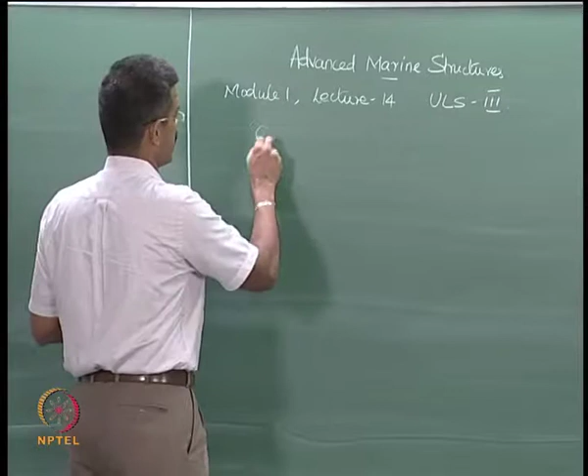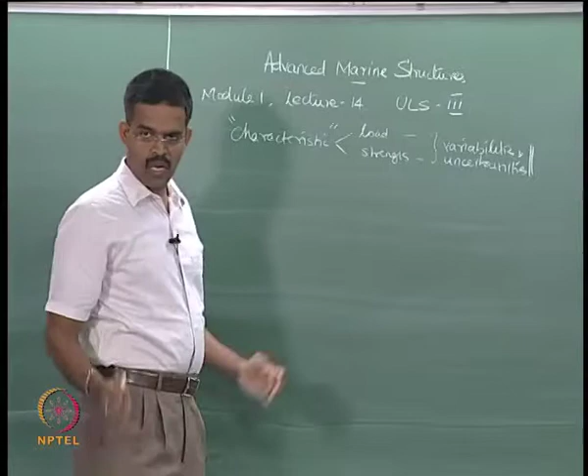This may refer to load or strength of material. We agree strongly that both the environmental loads encountering marine structures and the strength of material out of which these structures are constructed have a lot of variabilities and uncertainties in their computation, as well as in the assessment of strength. To account for this we introduce an adjective to these estimates, what we call characteristic. We agree that if load and strength are to account for different variabilities or uncertainties inherently present in their estimates, then the value should be probabilistic, it cannot be deterministic.

So to handle the probabilistic nature of these uncertainties we introduce a term called characteristic, and we agree that the distribution of these uncertainties or variabilities, based on which they vary, is normally distributed. Then we look at the distribution of their means.

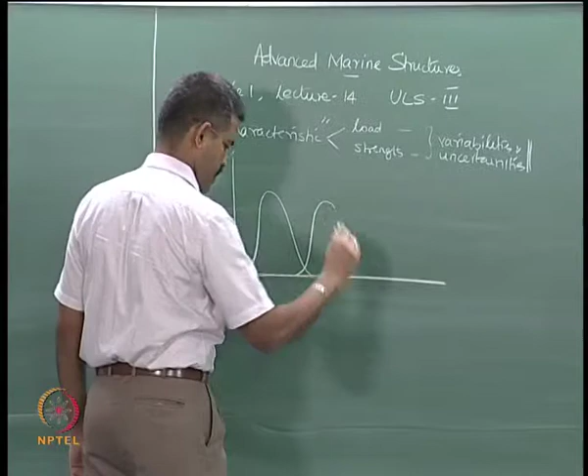I call this load, and this response. The hatched portion you see here is actually the probability of failure. This becomes the mean of the load and this becomes the mean of the response. Now I assume two distributions, R1 and R2. R1 may not have any superposition or overlap with the load, whereas distribution R2 may have an overlap with the distribution of the load.

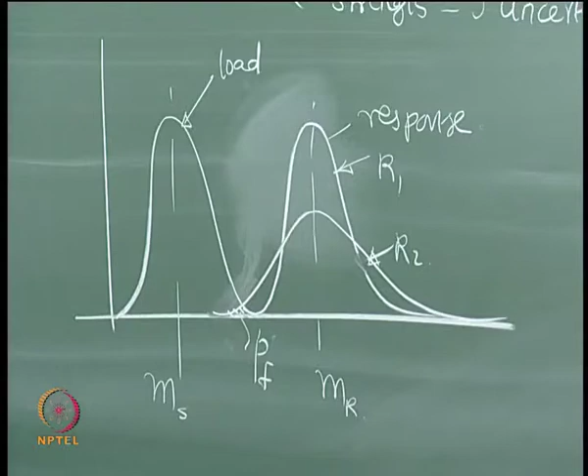We ensure that when the strength or resistance is lower than the applied load, it indicates a failure phenomenon. Now this can be equivalently understood as two distributions without overlap. I do not want a probability of failure, that is my ideal design.

So I select the mean in such a way that they do not have any overlap, agree? But the difficulty here is then how will you account for the excess in load estimates or deficiency in strength because of deterioration. So we fix up what we call

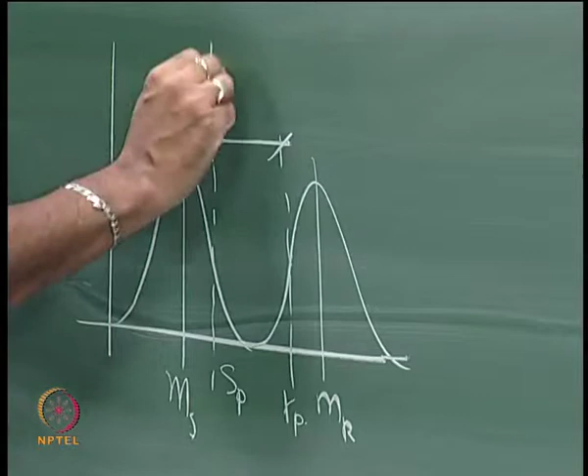the percentile fractile values. We call this SP and this point RP, and RP is gamma of SP. So obviously you will see that SP and RP are essentially certain percentages of the fractile of the distribution. SP is selected as 95% and RP is selected as 5%.

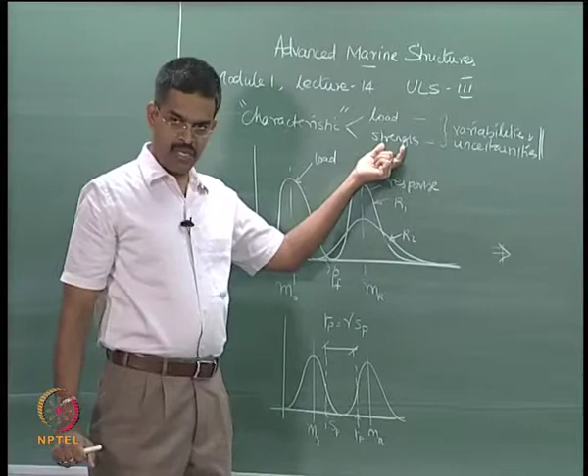So what it means is whatever load you have assumed on the structure, the probability of exceedance of that load in the lifespan of the structure is only 5%, that is, 95% it is reliable. And whatever strength you have appropriated in the design, 95% that strength will be met, but there is a probability of loss of strength only by 5%.

So what I am doing is instead of moving the mean value closer, I am keeping the mean value away, but fixing up two numbers which are called the characteristic values. So these SP and RP will define the characteristic nature of the load and strength respectively.

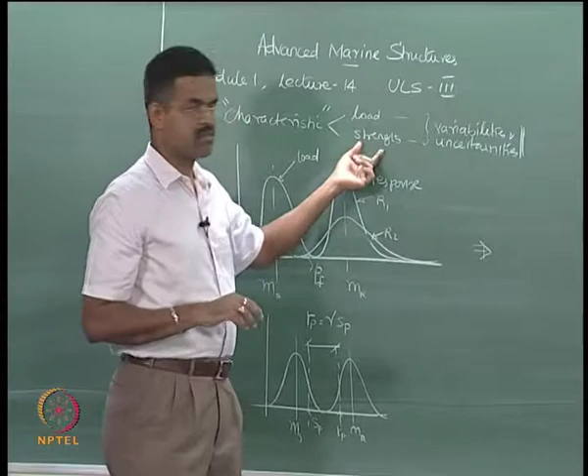As I said, they are independently varying, because the load variation or uncertainties associated with load have no direct connectivity or dependency on the uncertainty or variabilities associated with the strength of the material. So they are independently varying. The parameters on which load varies will be different from the parameters for strength, but for our understanding in design we have to look at safety as an integral unit of load and strength. We are looking for the safety of the system, so we have to connect them. The connection is essentially by this equation, where gamma gives you the margin of safety.

So SP will be associated with 95% of the fractile, whereas RP will be associated with 5% of the fractile. This is of course with the load, this is of course with the strength. So the probability of exceedance of the load in the lifespan of the structure is only 5%.

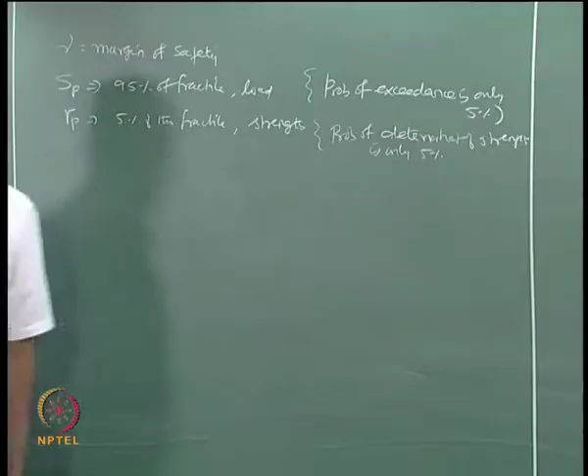Whereas the probability of deterioration of strength during the lifespan of the structure is only 5%. Is that clear? So I am putting the same number, but the meaning of explanation is different. This is probability of exceedance, this is probability of deterioration, that is, probability of not meeting the strength is only 5%.

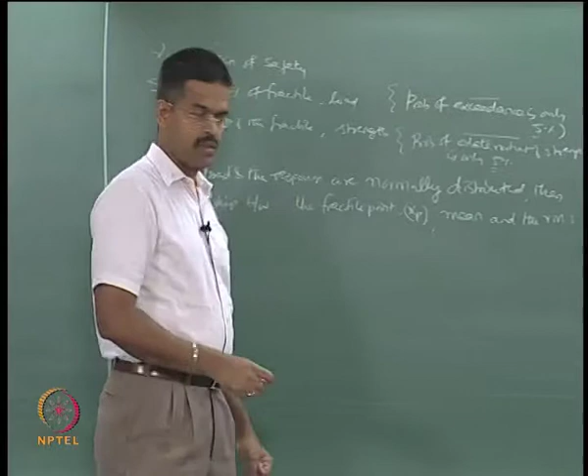Once we say that the load as well as the response are normally distributed, then the relationship between the fractile point, which I call xp, the mean, and the RMS, that is the root mean square, will be given by the following equation: Xp equals mx plus or minus Kp times sigma x. I think this is equation number 2.

Now, the fractile point can be selected in such a manner which depends on the value of Kp, because the mean and standard deviation of the distribution, be it load or resistance, is known to us. So to select a fractile percentile point, the whole equation now depends on the Kp value. Various international codes advise you to select this value in different manner. Let us look at what the Eurocode does.

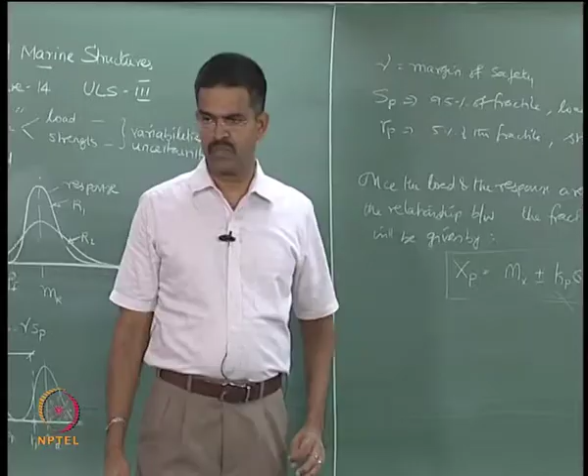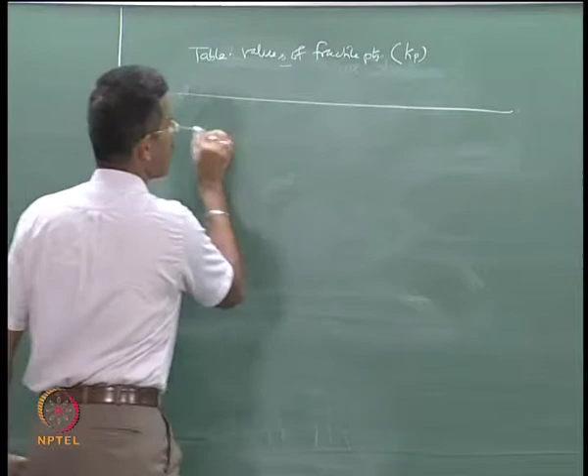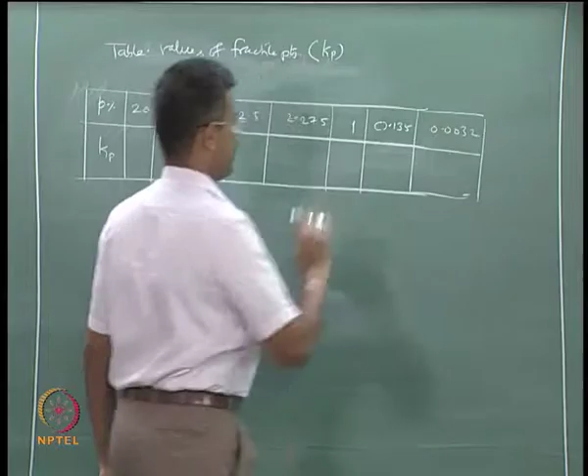Before that, we will have a small table which gives the value of Kp and correspondingly the appropriate percentile of probability. Let us say the values of fractile points, I should say Kp table. I will give the percentage probability and the Kp values: 20, 10, 5, 2.5, 2.275, 1, 0.135, 0.0032. The values of Kp for different percentages are given here.

0.842, 1.282, 1.645, 1.96, 2, 2.326, 3 and 4.

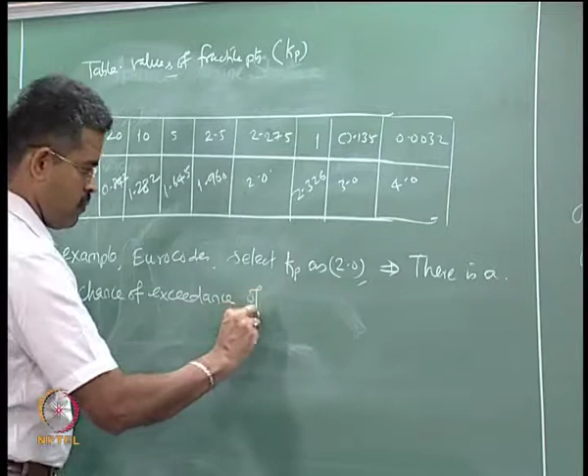Now, for example, Eurocode selects Kp as 2, which implies that there is a chance of exceedance of the characteristic values. I am saying values, it may be load, it may be strength as well, in the service life of the structure, only by 2.275%.

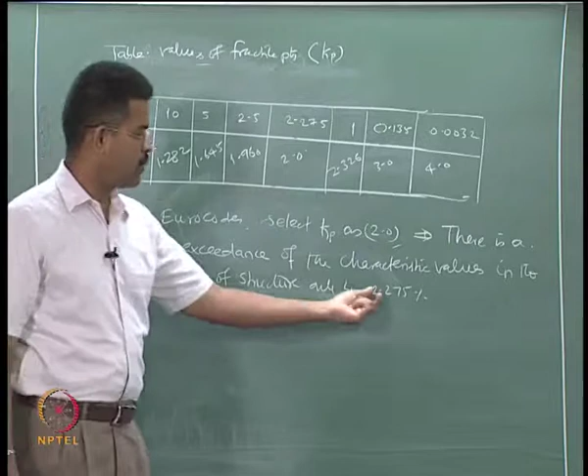So what does it mean? Neither the load nor the strength will deteriorate less than about 2.275%. So the load whatever you have estimated will be as accurate as 100 minus 2.275. The strength will be available as close to 100 minus 2.275.

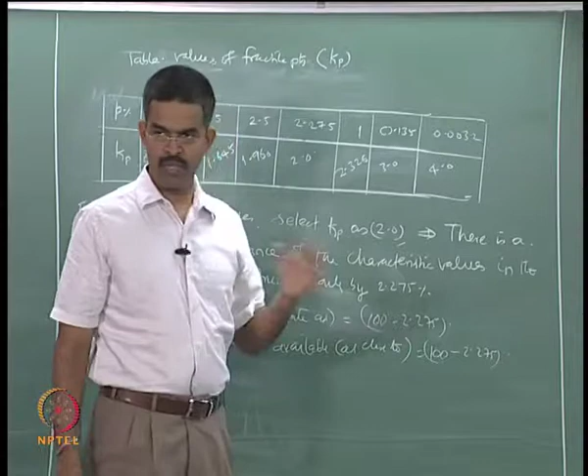So directly, the probability of exceedance of the load during the service life is only 2.275%. The probability of deterioration of the strength of the material during the service life is only 2.275%, the same meaning as we have here. Okay, that is for the Eurocode.

So different codes define different standards of the Kp number, which is the value of the fractile points in the distribution, to explain the characteristic value of the load and strength. In Indian codes this number is 5%, so the Kp is 1.645. This can vary in different codes. We are not debating on which code is following what number. The point is how accurate or how less accurate we are in allowing the load to exceed or allowing the material to deteriorate. We say I will allow a 5% deviation during the service life.

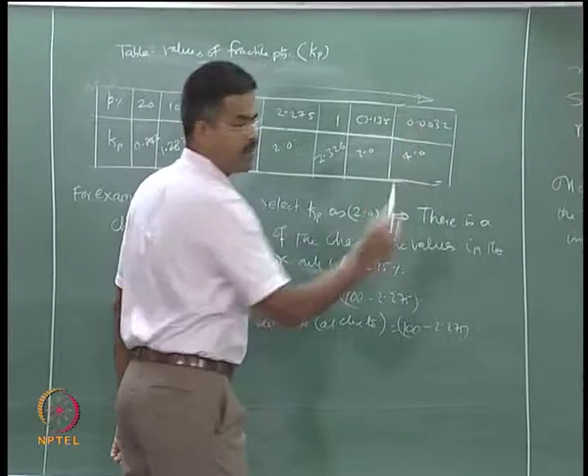Eurocode says no, let us allow only 2.275%. Remember very carefully: the lesser the percentage of allowance you are giving, or the higher the number of Kp you are using in your assumption, the more accuracy is demanded in computing the load and strength. Because if you look at Kp 4, it means it is only 0.0032 percentage. Practically, neither the load nor the strength should vary at all. Is it clear? So that is the meaning.

So the probabilistic nature is indirectly brought into the design, in ultimate load design, by associating an adjective to the load and strength. Then these two are combined with a safety value which we call gamma.

So I should say the safety factor gamma is Rp by Sp, which I can write as characteristic strength by characteristic load.

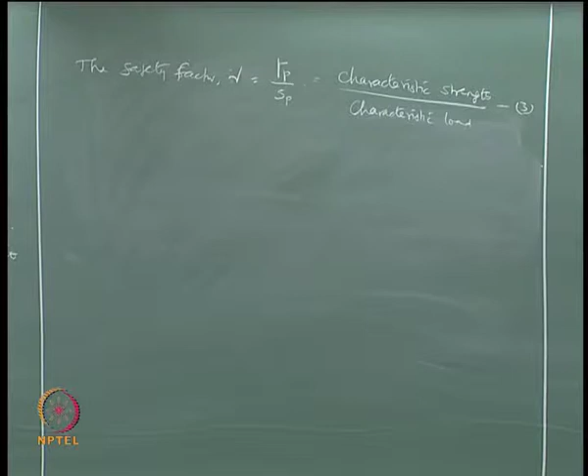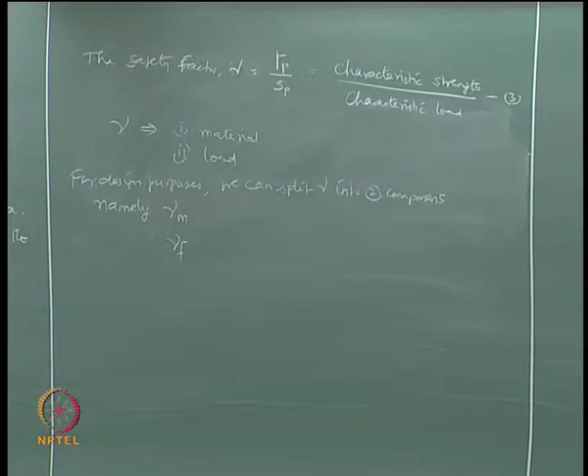Now this safety factor is associated with two components: one is the material, the other is of course the load. So let us say for design purposes we can split gamma into two components, namely gamma m and gamma f. Gamma f relates to the load, and gamma m relates to the material.

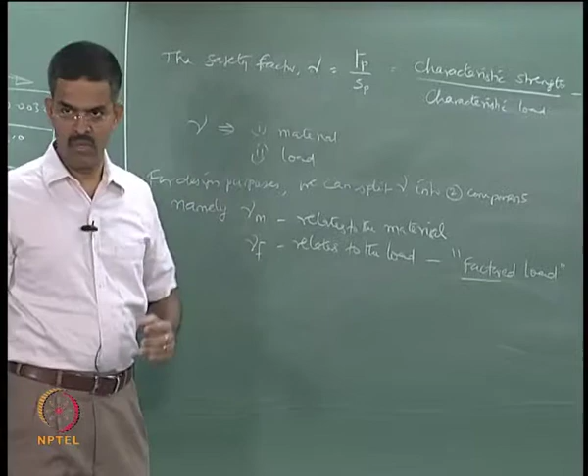Some codes, for example Indian codes, call this: when gamma f is multiplied to the working load, I call that the factored load. See, factor in terms of mathematics is always a number less than 1, but gamma f is always more than 1. So factored load does not mean you are decreasing the load, you are enhancing the load by some percentage which will account for uncertainties or variabilities.

So I want to substitute this gamma as a product of gamma f and gamma m in equation 3. So substituting equation 4 in 3, I should say gamma f gamma m is Rp by Sp, so I should say Sp into gamma f, because Sp is related to load, Rp is related to strength which is the material. I am grouping them: this is the load, this is the material. So gamma f into Sp is equal to Rp by gamma m.

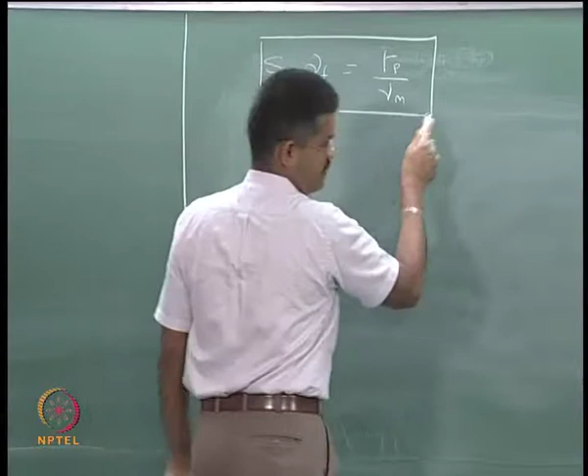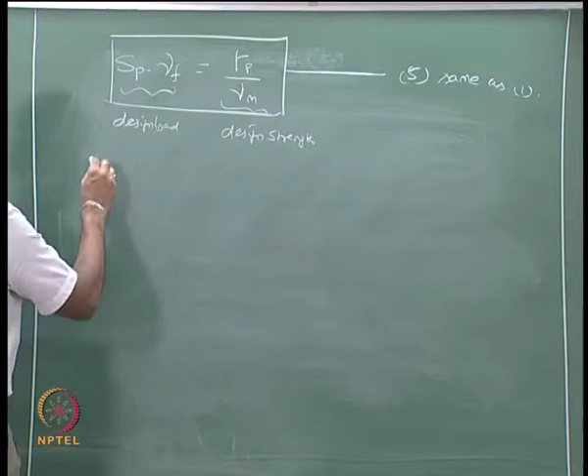So though we have two components, which is the load acting on the structure, and the strength which depends on the material used to construct the structure, we do not use these values directly in the design.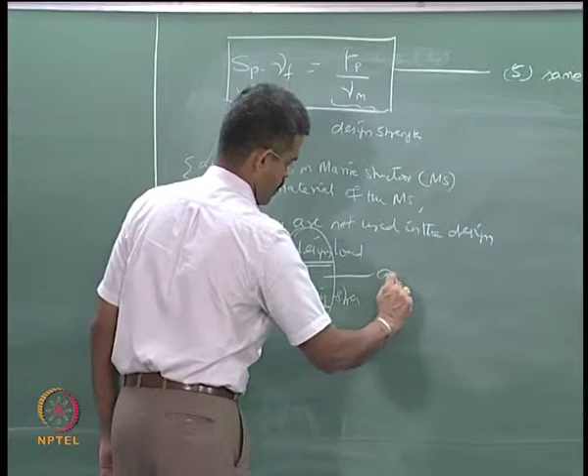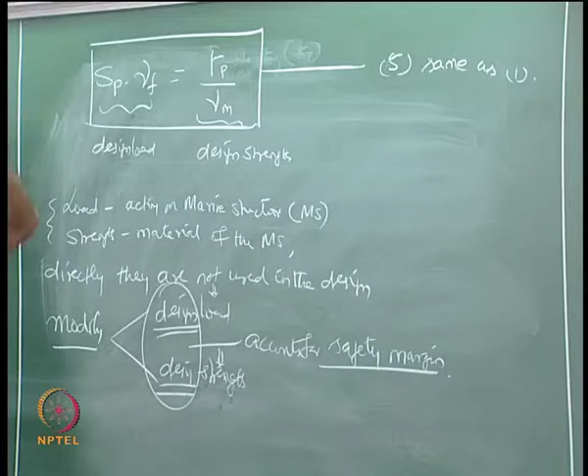The reasons are obvious, as we discussed in the last lecture - lot of variabilities, uncertainties. So what do we do? We modify these values as design load and design strength. The term design accounts for safety. So whatever load is encountered on the structure is different from the design load used for designing the structure - they are different. Whatever strength of the material you have, for example yield strength, Young's modulus, ultimate, whatever it may be, those values are not used directly in the design. You have got something called design strength, which means you are dividing that value. As far as strength is concerned you divide it, as far as load is concerned you are increasing it. It is very important.

Just to have a clue, if you look at concrete as a construction material for marine structures, gamma f, the load factor, is 1.5, and gamma m, the safety factor for strength of the material, is 1.15, just for example. This number can vary depending upon the code, the material, etc. This is just an example.

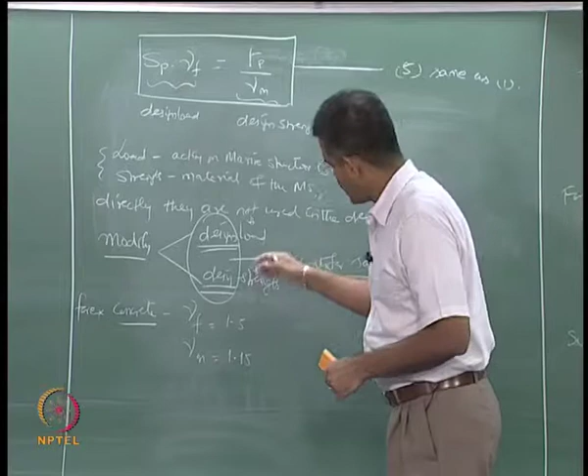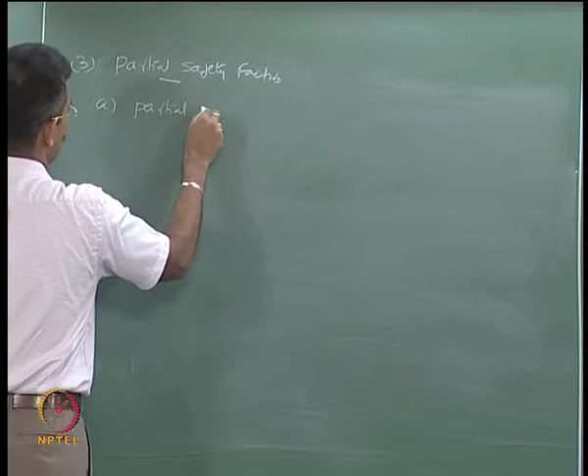Now, as we saw in the last lecture, you can classify the variabilities in the load as well as in the strength in different segments. They are all accounted together in one number which we call gamma m, or in one factor which we call gamma f. But many codes for design purposes split these values. Once they are split, they are called partial safety factors. The moment I say partial safety factor, you can have partial safety factor for load, and you can also have partial safety factor for material.

Let us talk about loads. I should say gamma f is the safety factor for the load. I want to split this safety factor into different components which will account for these uncertainties. I call them gamma f1, gamma f2, gamma f3 - they are all products.

So gamma f1 accounts for deviations of the load from the characteristic values.

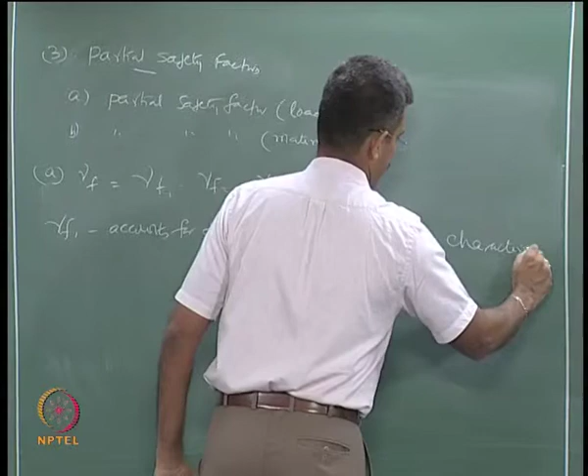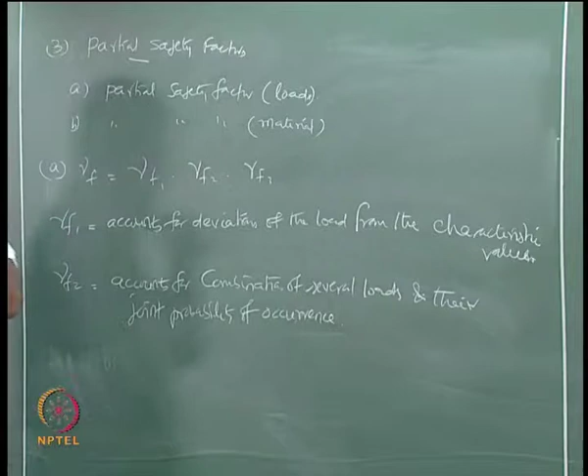Gamma F2 accounts for combination of several loads and their joint probability of occurrence. As we have been seeing in the last lectures, there are various loads like wind, wave, current, ice load, earthquake, etc. All of them do not act in a joint manner on the marine structure at all times. So what is that combination you account for? There is again a chance of error which one can encounter in assuming the combination of these forces. Now gamma F2 accounts for that combination probability, or the joint probability of occurrence of these forces together in a given structural system.

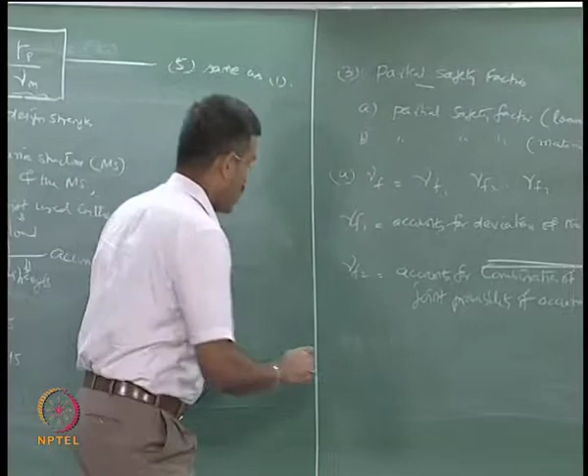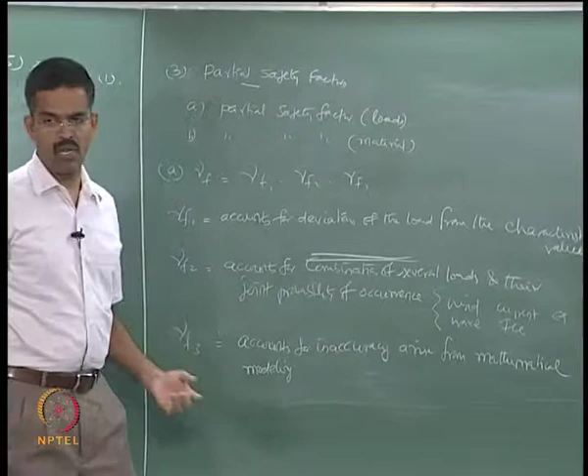Gamma F3 accounts for inaccuracy arising from mathematical modeling, that is, error between the computational load and the real load. There may be error - the real load can be x, but you are computing this as x1. x1 may be either higher than x or lower than x, that is not the matter here, but there is a difference, x1 and x are not equal. So this accounts for that inaccuracy which arises from the mathematical modeling when you compute the loads. So all of them put together account for a single safety factor in the load which we call gamma F, which is multiplied with the applied load to give you the characteristic load, or factored load, or design load.

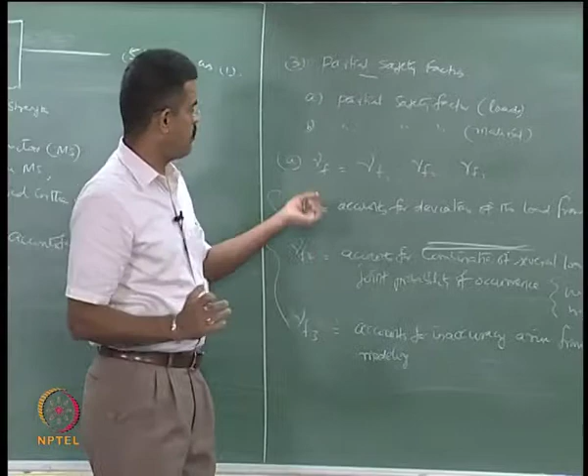Now it is very unfortunate, and also interesting to know, that most international codes do not separate gamma F into pieces as F1, F2 and F3. They will not give you this, because estimating these independently in terms of load is very difficult. So therefore many international codes do not give the breakup of the gamma F value. For example, if I say gamma F value for concrete is 1.5, I will not give the breakup of 1.5 as equal to some combination like 1 of 0.75 and so on. I will not give this breakup for each component independently, because there is no guarantee that these values can be computed accurately.

So you will always know only the joint safety factor, which accounts for different deviations and variabilities in the load as well as in the strength. But as far as material strength is concerned, there is some accuracy available compared to the load - it is slightly better.

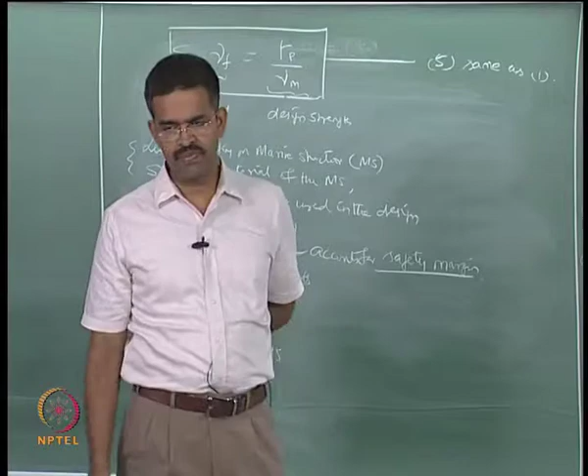Okay. We will talk about that when we do the design, how this is accounted for.

Why am I explaining this? Because when you start working out these safety factors in terms of reliability analysis in the third unit, you would like to know what factors contribute to gamma F and what the independent dependency of each one is, since F1, F2 and F3 are independent of each other.

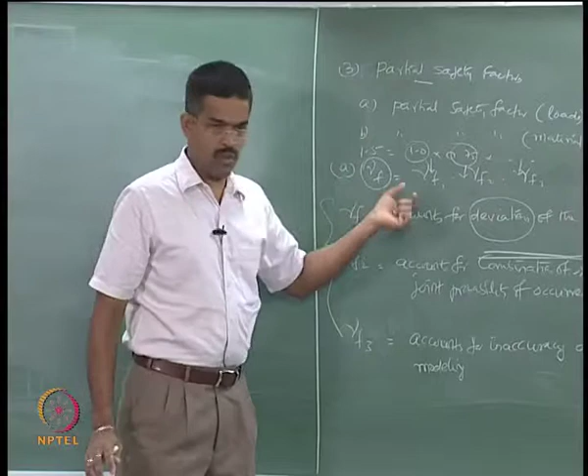One is about deviation, one about combination, another about inaccuracy in the mathematical model. They are independent of each other, so there is no cross dependency, but the contribution of F1 on F, F2 on F, and F3 on F is important. That breakup of gamma f into F1, F2 and F3 will be important when we discuss reliability studies in the third unit. As far as codes go, many international codes, not just the Indian code, do not explicitly give independent values of these partial safety factors. They are only interested in the overall safety factor given in the code as is.

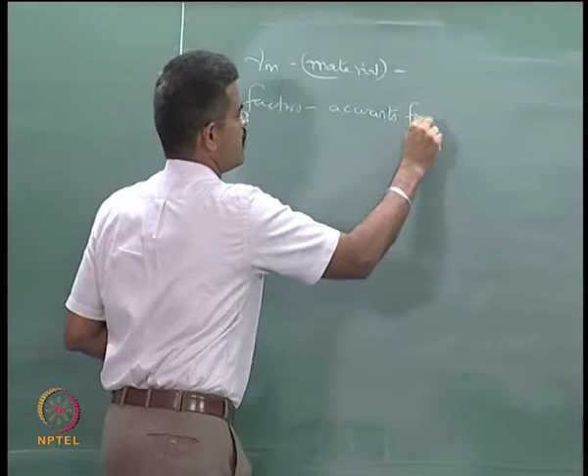Now, as far as material is concerned, there are various factors responsible for gamma m. What are those factors that account for gamma m? One is variation in strength of the material. The moment I say strength of the material, I am talking about sigma yield value, Young's modulus, etc.

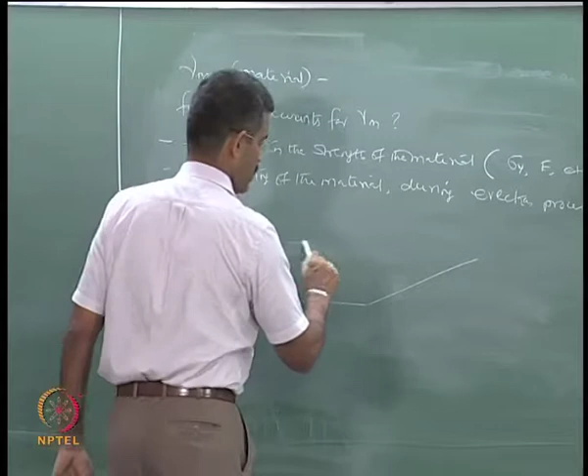Another factor is weakening of the material during the erection process. There is a possibility here I will talk about quickly. You have got a long plate in length and breadth, but the thickness of the plate is very thin.

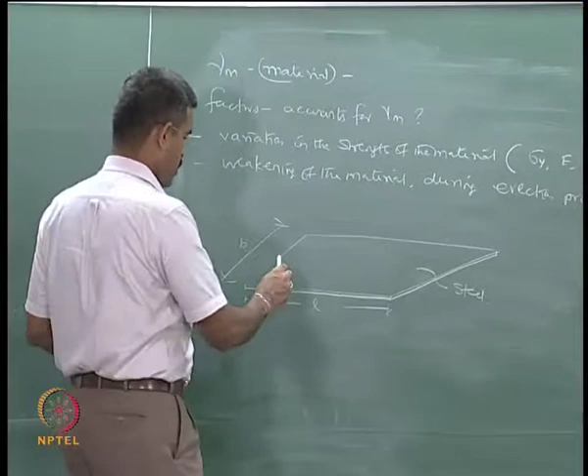It can be a sheet basically, even if it is steel, if the length and breadth of the sheet are comparatively larger, for example 6 meters and 2 meters. However, when you try to lift the sheet it will start buckling or bending. Let us say you try to lift this plate at both ends with a hook of a crane, the plate will start bending, so obviously at the middle of the plate you are creating a high stressed section by the erection process.

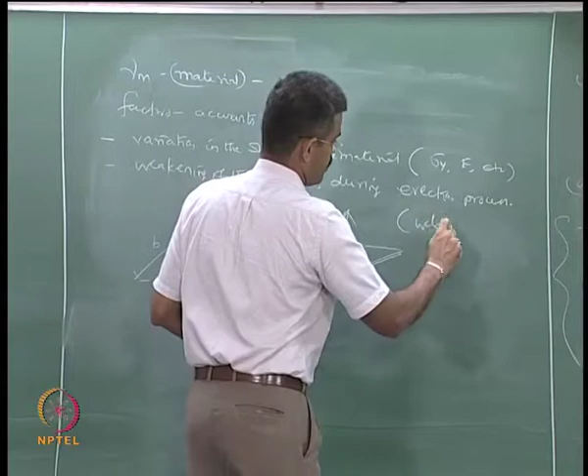This has nothing to do with material deterioration at all; the material is uniform, homogeneous, with strength and properties uniform across the cross section, breadth and length. There is no such hypothetical material, but you have created a difference and deterioration in the strength of the material because of your erection process. This is very common in offshore and marine structures because welding induces stress concentration at hot spots, creating this kind of stress difference in a given plane of any member or material. That is what we call weakening, which comes not from the manufacturing process but from the construction methodology or erection process.

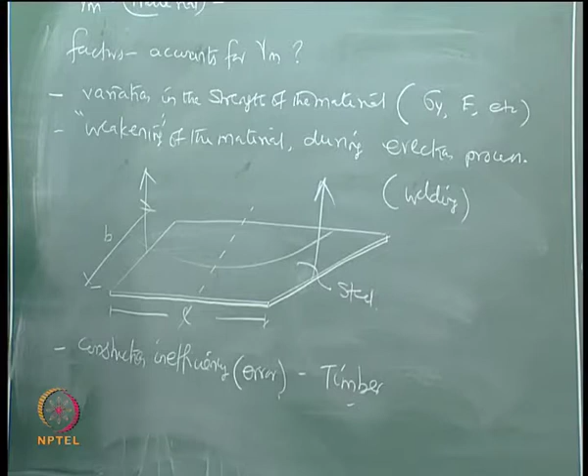Construction inefficiency, I put as errors. Let us take for example timber, which is one of the very common construction materials for ship structures. Now timber has classical properties along the grain, in a given timber plane, and across the grain.

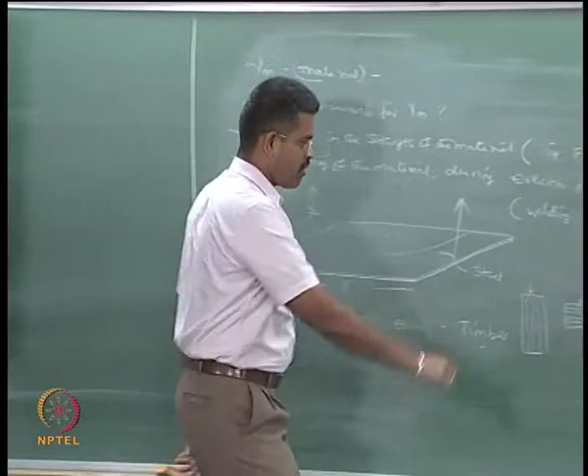Now you are creating a plate, column or beam by joining different timber or teak wood pieces together. If you misorient the alignment of these grains, you will land up with construction inefficiency, because the strength along the grain is much higher than the strength across the grain. If you cross this, you are creating an inefficiency in the stress distribution, which can also account for variability in gamma m. This is again a construction error or fault.

The second example could be a column that may be 12 meters long and should be a single piece, but you do not have a 12 meter long piece manufactured, you have a 6 meter long piece. You join this in 2 parts, but while erecting, the center of the top piece and the center of the bottom piece are shifted, so you are creating an eccentricity which will cause a moment at this joint. This is again a construction inefficiency, and so on. These are all errors associated with the strength of the material, which has nothing to do with the load coming on the structure.

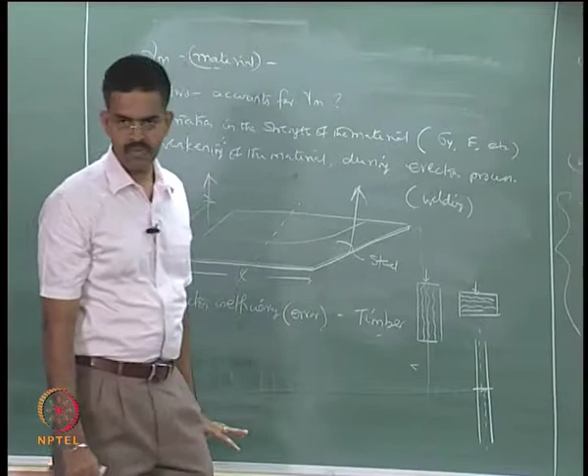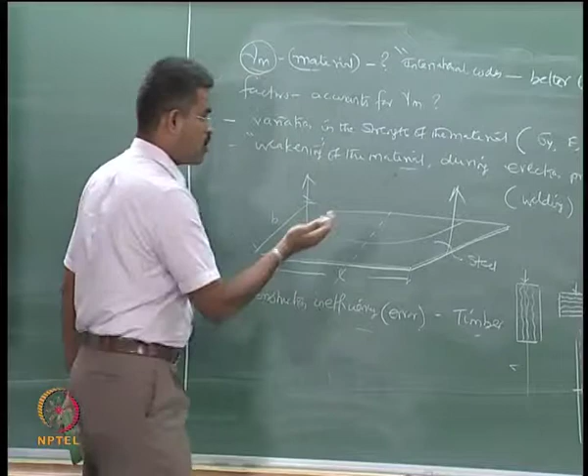So how gamma f and gamma m are handled in international codes is a very interesting question. I can give you a clue that it is better, how gamma f is handled in the codes. We will discuss this in detail in the next lecture when we talk about an example, because I will take up an international code problem and solve it using that code. You will see how gamma m is handled in a different manner compared to gamma f in that code, and then you will see all these construction process errors are accounted automatically in estimating gamma m independently and explicitly. Gamma m may have contribution from these factors independently, but unlike gamma f, explicitly these contributions are not available in the code, though certain codes deliberately give the contributions from these explicitly available.

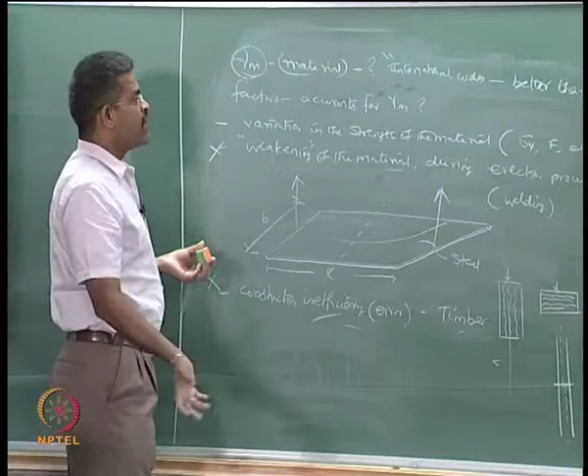There is a reason for this. By looking at these numbers of explicit values available, one can try to avoid these errors. These are all man-made errors actually. Remember, these errors are all created by nature except this. Whereas these are man-made errors, you could avoid inefficiency, you could avoid weakening of the structure, you could manufacture a material which will have uniform strength, etc. Therefore, it is possible to evaluate this independently. So these values are explicitly available in the codes, whereas for gamma f, the partial safety factors independently and explicitly are not available in the codes.

Having said this, we will talk about something called load effects. Now the loads and load effects are different. Loads are what is actually acting on the structure, effect is the consequence of the load acting on the structure, but it is not the response of the structure. Remember, load effects are not response of the structure, they are different. Response is associated with many factors.

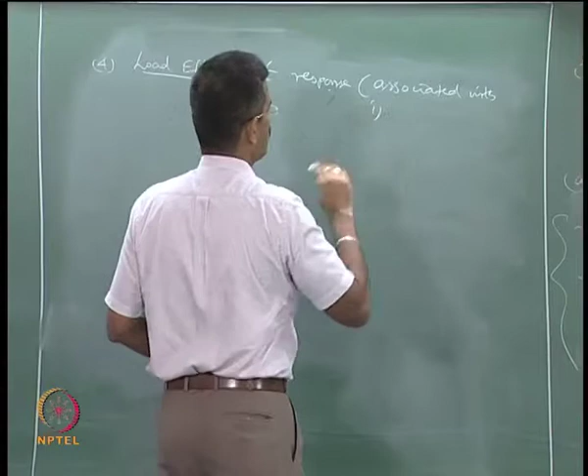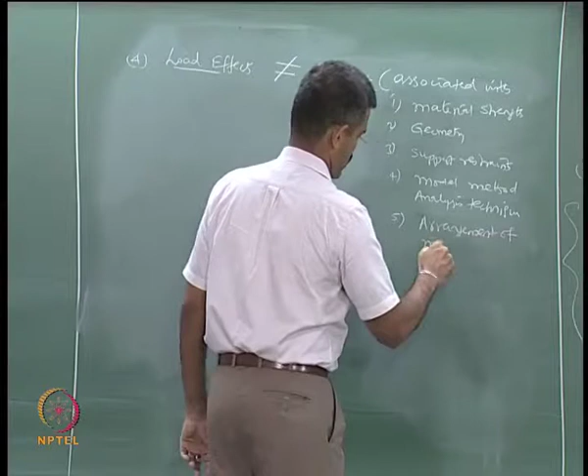Can I name a few factors? If you want to find the response of any given structural system for any given load which is known to me, what would be those factors based on which response can be computed? One is of course the material strength, 2 it would be the geometry, 3 it would be the support restraints, 4 it would be the modeling method. If you are looking for random vibration analysis, if you are looking for deterministic analysis, model method, or I should say analysis technique, then I should say arrangement of members, etc. Geometry is nothing to do with the arrangement, this is dimensions of the members, etc. So, depending upon these factors, response is computed.

Remember, none of these factors are directly affected by the load, they are independent. So I say load effect does not mean that it is response, it is different. Load effects are the consequence of the load coming on the structure.

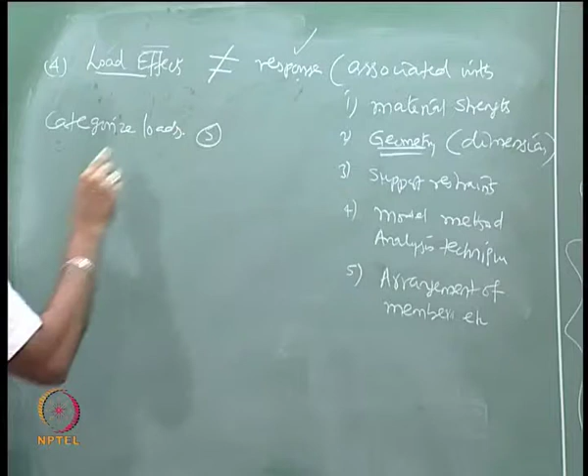To understand the load effects, I can categorize loads into 5 parts. Permanent load, I call them as P, live load, deformation load, environmental loads, and of course accident loads. Call this A, E, D, L. So there are 5 categories of loads.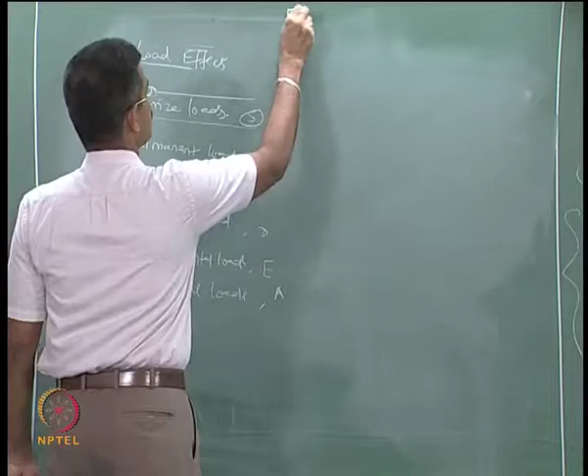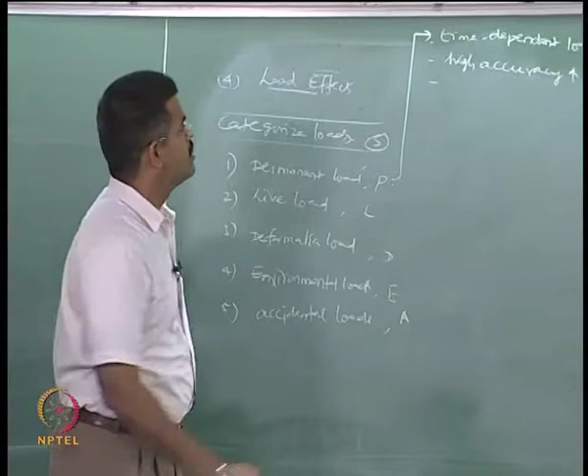So let us quickly see each one of them briefly. If we talk about P, this includes time dependent loads, generally they can be determined with higher accuracy. They can be determined with higher accuracy. We already know what are the permanent loads coming on different example structures available in the literature. So it is actually the mean value of the loads acting on the structure. You already know these values, you can take a mean value of this.

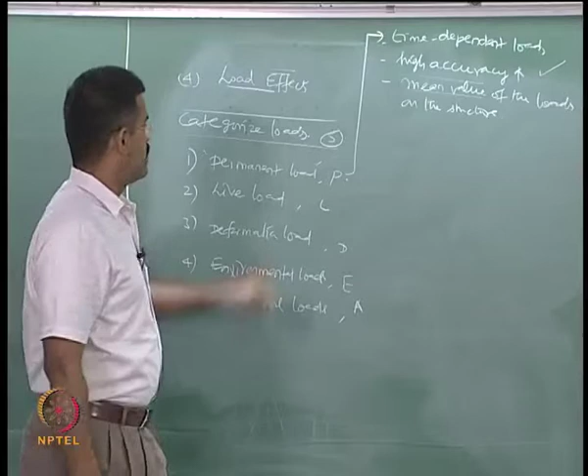If you really wanted to know what is, let us say, the crane load coming on the deck of an offshore platform or a marine structure, you could see what are the varieties of cranes available in the market, what are the loads coming on the crane, you can take a mean value, you can find out that value as the crane load P on the deck. It means they are computed with higher accuracy, they can be computed easily with lesser errors. So how does it mean that this effect will help me in estimating or minimizing the uncertainties?

Now, I am looking at the effects caused by the loads, the effects are not the responses. Then what effects? The effects are what would be the probability of exceedance of this load independently. On the other hand, what is the probability that the permanent load coming on the marine structure can be exceeded? I want to know this.

Since these loads can be computed with higher accuracy, based on some distribution technique, the probability of exceedance of this load alone in a given marine structure is very low. Is that clear? Because they are already computed with higher accuracy. That is the effect I am talking about.

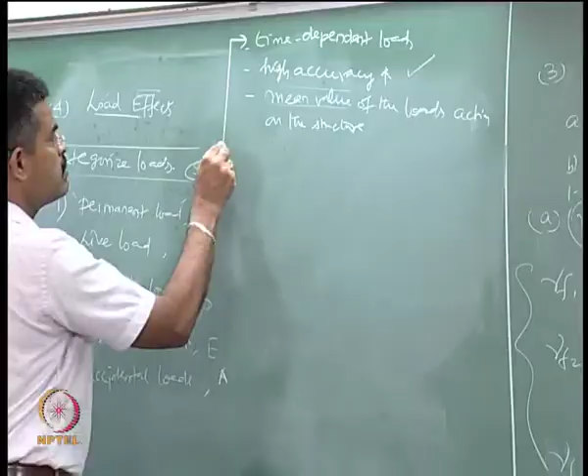Live loads are associated with, this is the live load, loads that arise from nature. Now therefore, the choice of characteristic value of the live load depends on the type of the structure you are looking at.

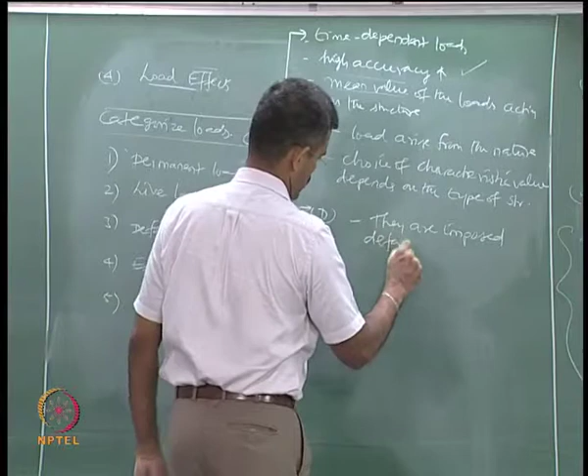Talk about deformation loads. They are imposed deformations on the structures. Can you give me a very clear example of imposed deformation which can cause a load on the structure? There are many examples I can give you. Many examples, I am not going to explain them, just giving examples.

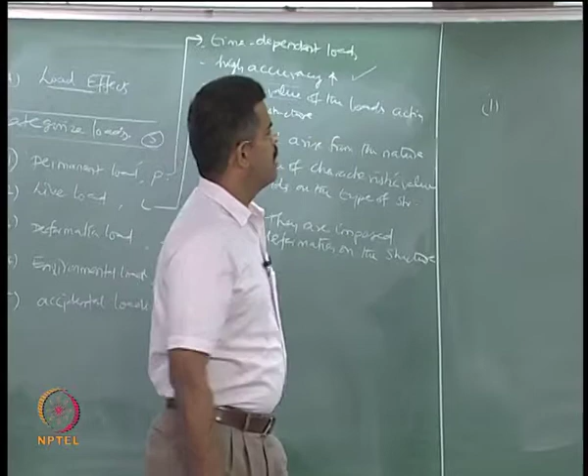If you have a very long beam, maybe simply supported, very long span beam, when such beams are constructed, you always give an upward camber to the beam when it is being constructed. When the shuttering is done for the beam, I am talking about long span beams, maybe the span exceeds 8 meters, 10 meters and so on, very long span beams. Even when the shuttering is done, an upward camber is given, because this upward camber will settle down in due course when the concrete is being poured, because of the span effect.

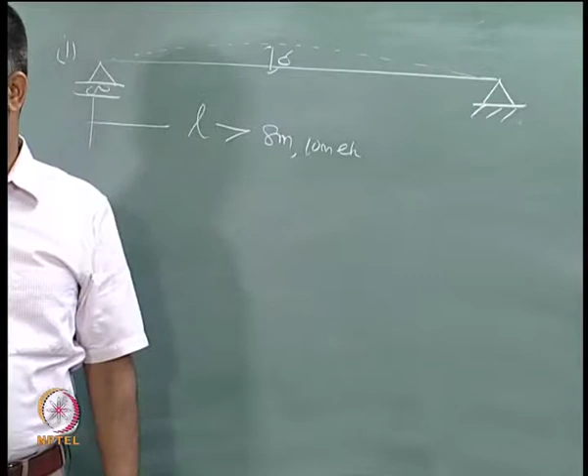Okay, an upward camber is given. So this imposes a deformation which is going to help in settling or avoiding excessive deformation of the member. On the other hand, if you had given the beam straight initially, then this delta would have been an added deformation due to the span effect alone. Okay, this is what we call camber.

This camber can be seen almost in all trusses. If you walk down to a workshop, you will see the bottom chord member is never horizontal, it is always lifted slightly up. You can even visualize this from your naked eye, it is always lifted up, an upward camber given.

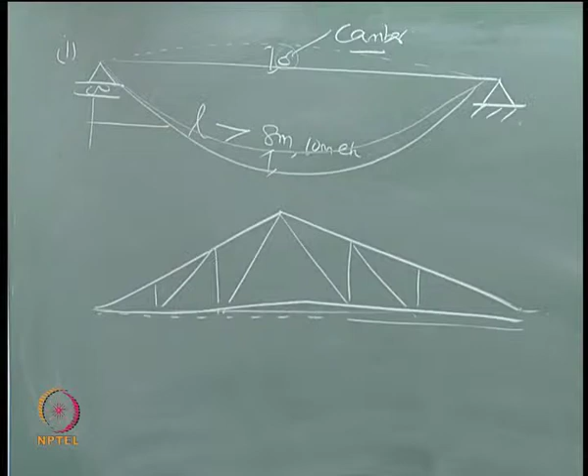And in structural analysis, you have heard about settlement of supports. When I have a beam whose support is settled with respect to the other one by an effect of delta, this imposes an additional moment, okay, 6EI delta by L square, that is an additional moment, and so on. So imposed deformation of the structure will also cause a load. The effect you are talking about is this.

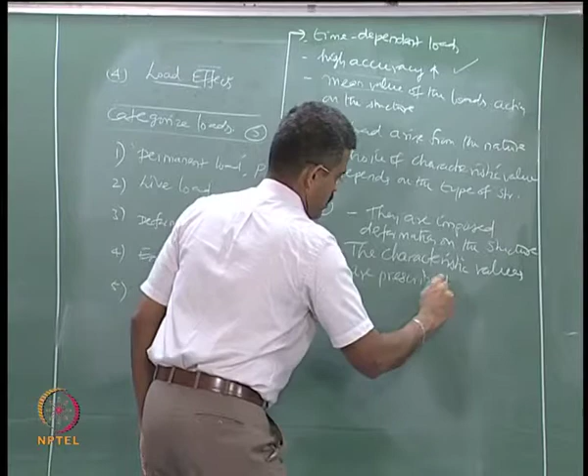Now for such loads, the characteristic values are prescribed to the maximum.

Talk about environmental loads. They are, for example, ice loads, earthquake loads, etc. Their mean return period is used to compute these loads. I already showed you an example.

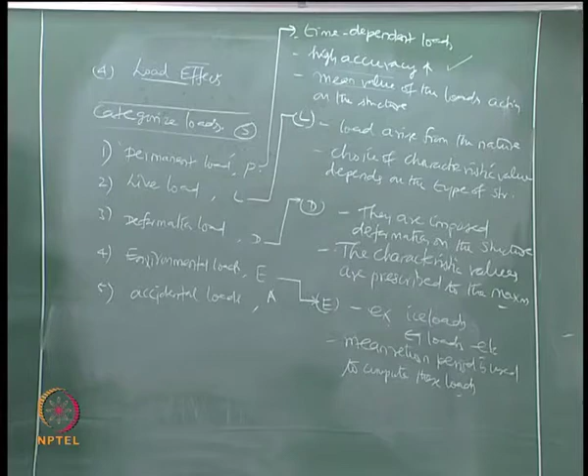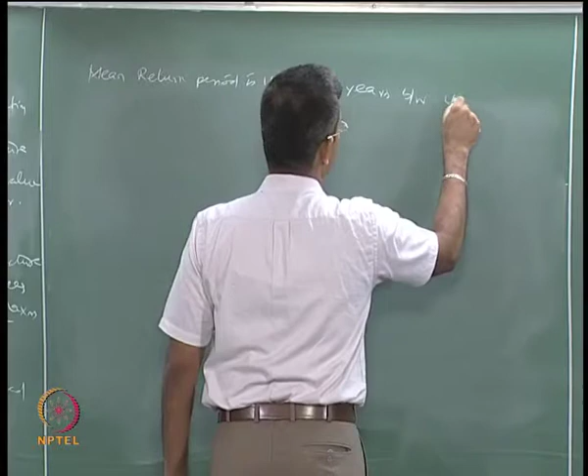Now the question comes, what do you understand by mean return period? So mean return period is the number of years between the season to occur for its maximum amplitude.

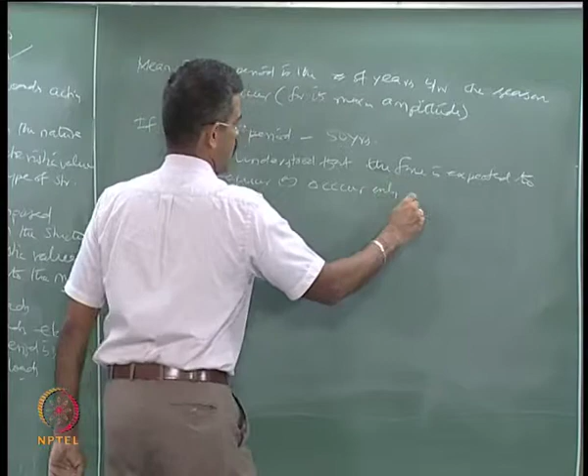In simple terms, if the return period is 50 years, it is understood that the force is expected to occur only once in 50 years. That is called a return period. The same amplitude will reoccur after 50 years, that is called return period.

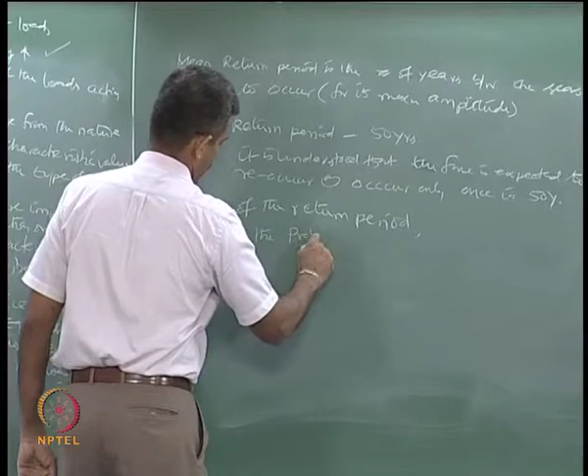Inverse of the return period, if you look at that, will give you the probability that the extreme value of the load is exceeded in 1 year. That is called inverse of the return period.

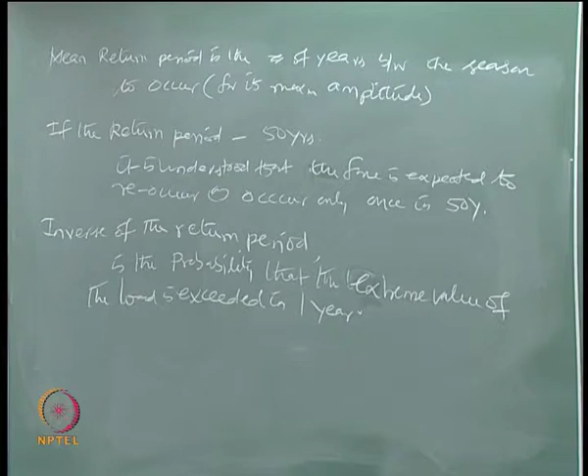We will talk about this in the next lecture. We will elaborate this return period concept for wave and wind loads and their combination, and we will also talk about accidental loads and load effects. Once we understand this, we will see how material strength plays an important role in ultimate limit state or ultimate design mechanism or load principles in marine structures. Then we will finish this topic on ultimate load design and move further to plastic design. Okay, we will meet in the next class.